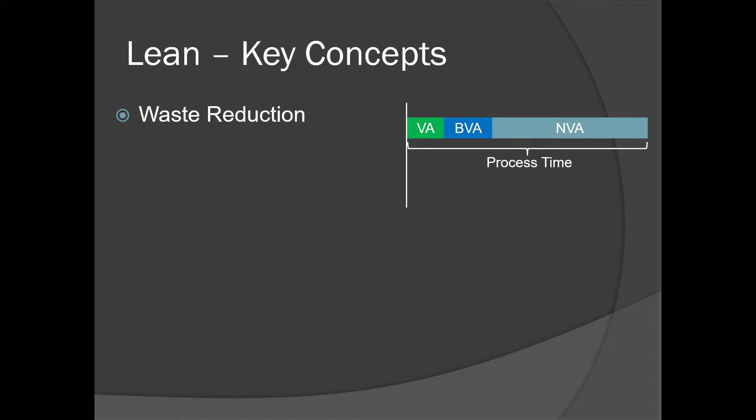Right, so let's talk about some key concepts with lean. First one would be waste reduction. Basically, what you're attempting to do is look at a process and define which steps are value add, which are business value add, and which are non-value add. So value add would basically be the steps that the customer would actually be willing to pay for.

Business value add are things that you have to do either from a legal standpoint or certainly mostly regulatory, but also HR compliance and those types of things. Just things you have to do because you're operating a business. And then the last piece is non-value add. Non-value add is anything you're doing that the customer would not be willing to pay for that you don't have to do. So the goal over time is basically to reduce the non-value added work, to free yourself up to do more value added work.

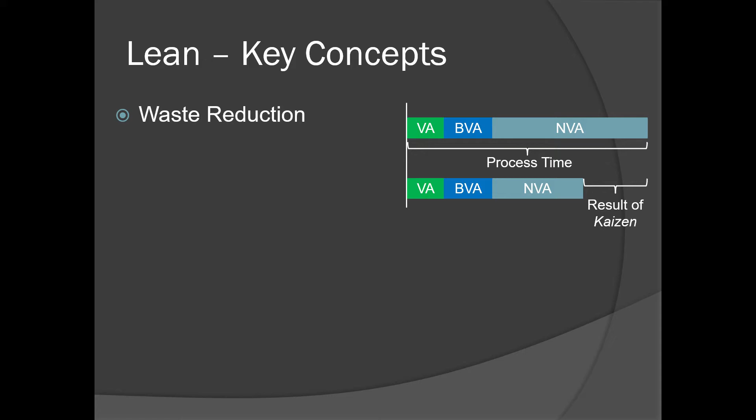And the way you do that is through a process called Kaizen, which basically means small incremental change. There's a lot of other ways of doing it. There's larger scale improvement ideas that you can implement. The problem with those a lot of times is they're harder to sustain. They're also harder to predict how they're going to actually improve things. So the best case scenario is that waste reduction comes through very small incremental daily changes that add up to very, very large improvements over time.

The next one I'll mention here would be value stream thinking. So value stream thinking, the best way for me to describe it is use a Toyota example. Basically most other car companies, the way they build their cars is they'll have the marketing group work with a design group and come up with, here's a new vision for a car. They hand that plan off to the engineering group. The engineering group tinkers with it and says, there's no way we can build this. Here's the changes we have to make. Then it goes back and forth a little bit. And then they hand that final version over to production.

And then production says, we can't possibly make this car at a cost that we could sell it at, right? So now production has to deal with all of those changes that were recommended, yada, yada, yada. So on it goes. And suddenly you've got all these different silos operating independently with each other. So that final version that you come up with is actually not really the optimal car. It's just the car you end up with, right? Because then after production, you have to have procurement look at it and decide which suppliers to use, all that.

So value stream thinking, instead of organizing folks functionally, you actually will take 5 or 6 design folks and 25 engineers and 10 production folks, and you put them on the 2025 Camry team, and they're going to work together for the next probably decade, that group of people, and they're going to work in the same area, and they are going to wake up and go to sleep every night not thinking about engineering or about design or about production. They're going to wake up thinking about that 2025 Camry. Like, that's what their focus is, right? So that becomes a value stream for Toyota, is that new product line.

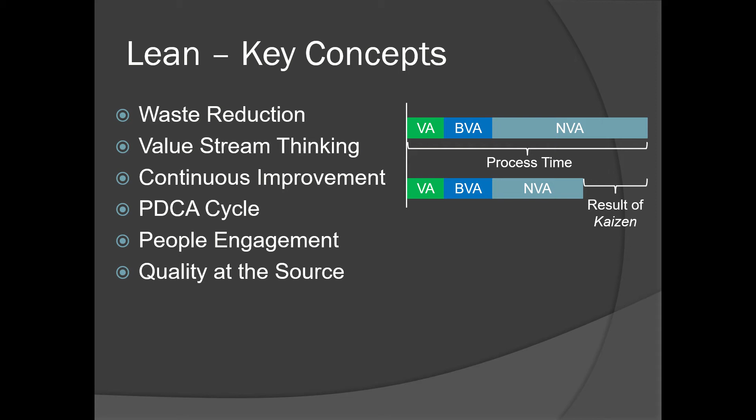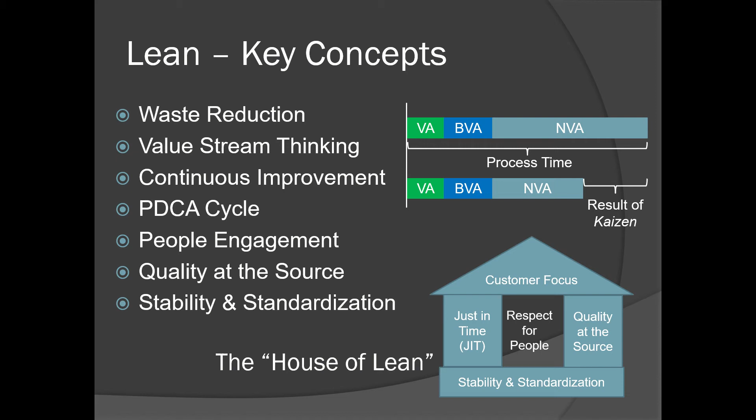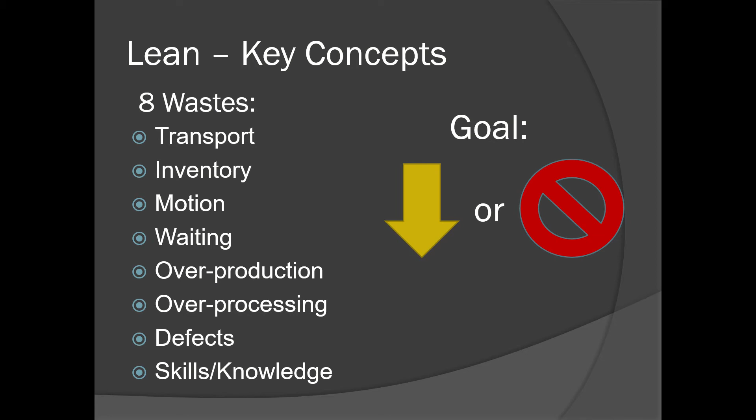All right, I am not going to spend time on this because I know that you heard about these. I think DOWNTIME is the approach that LeanCor uses. There's a lot of different ways of looking at it. I learned TIM WOODS a long time ago, TIMWOODS. But yeah, I'm not going to spend time on it. I already said that. So, all right.

So a few applications in the supply chain when it comes to lean. The first one here is standardization. So I talked about EDI transactions. There's a lot of other ways of noting standardization opportunities, but basically, especially when there's multiple companies involved, you have to have a standard process so that everyone knows every time this happens, every time the truck shows up, every time the part gets ordered, there's a standard in place.

That's critical. Stability: figuring out what is causing variation, and do your best to avoid or minimize those as much as possible. A lot of the demand management and order fulfillment steps we talked about in the first half of the class really talked about variation and the impact of variation. Lean has a relentless pursuit towards stability, right? You're never going to get perfect, especially with omni-channel and customization. You're always going to fight against that, but doing everything you can to provide stability in your operation is absolutely critical.

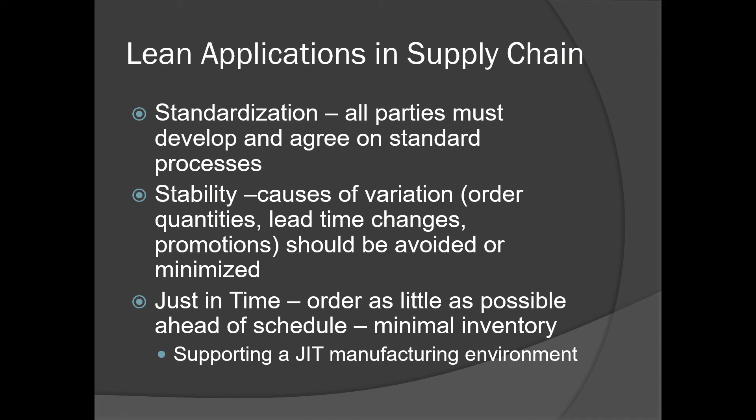Next up, with just-in-time, basically all you're trying to do once you have a stable process in place is order just enough to get you through to the next delivery. You have to have a stable environment. Toyota has tires and wheels delivered less than an hour before they're going to be used on the line, right? The only way they can do that is because they have a standard process and a stable process in place. A few more applications.

This one's called Jidoka, or intelligent automation. I really like when these processes get implemented. Being a software guy, the best case scenario when you have the opportunity to build some software is the process you're automating has already been tested out and is clear. So what you're automating is a well-defined and clear process, and you're doing the automation basically to cut out errors and make things more efficient. That's definitely the Toyota approach, as opposed to, let's put in 1,000 robots and hopefully they'll figure out how to weld a car together, right? They only do that when they know specifically what the standard work is and how it should be implemented.

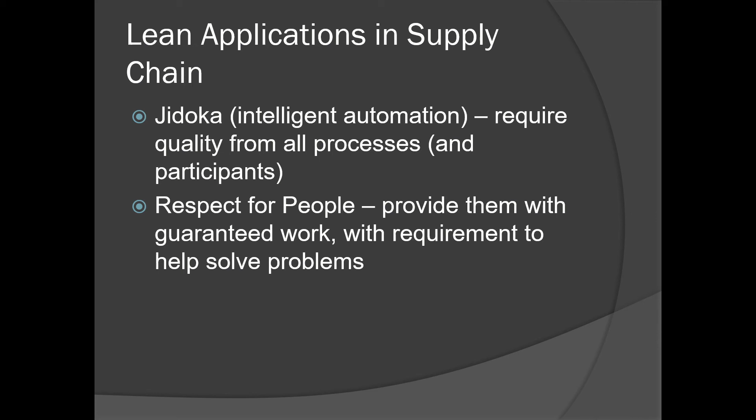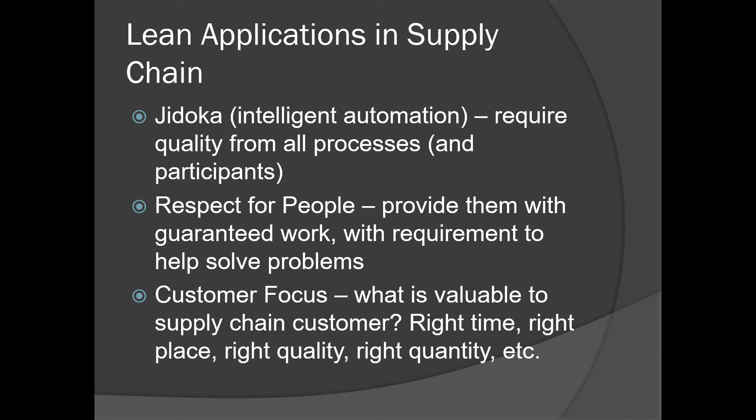Respect for people, again, I think I've harped on that enough, but just to say it again, basically require them to help solve problems. Basically say to your employees, I trust your opinion enough that I'm going to listen to you when you have ideas. And then a relentless focus on the customer: what is valuable, and how do we provide that to you at the lowest cost possible. That's a huge focus of lean and should be our focus really across the supply chain.

So a few notes on inventory carrying costs. I know we talked about it in the total landed cost or total cost modeling, but I just want to describe it again really briefly.

Inventory carrying cost is basically a number that every company comes to an agreement on, basically establishing this is how much we consider it to cost us to hold inventory. There's a much better way of saying that than just using the words in the definition, but essentially, how much of our money are we spending just keeping this inventory? That was no better. All right.

So typical components of inventory carrying costs: certainly the cost of capital and the storage costs, like the physical holding of that inventory, but you also have a ton of obsolescence and damage, especially if you're dealing with anything perishable like food, taxes and insurance. You actually have to pay more insurance and more taxes the more inventory you're holding. And every time you move parts around in a warehouse, you're spending money that you shouldn't because of all the extra inventory.

So we actually measured in one warehouse that I was observing in and doing some work in, one pallet got moved 17 times over the course of its time in the warehouse. If that pallet wasn't in the warehouse, those parts certainly weren't needed. None of those moves would have been necessary, right? And think what else we could have accomplished during that time.